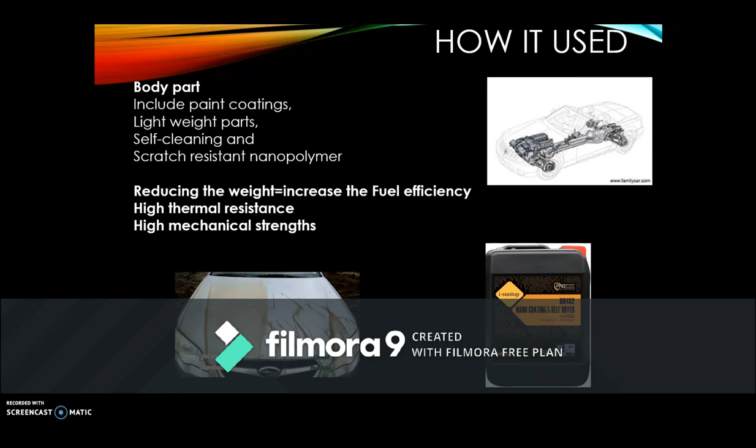Other than that, the material near the engine parts should possess high thermal resistance, whereas the exterior and structural parts should be made of a material that has mechanical strength.

And the second is engines. In a modern automobile, around 10 to 15% of the fuel energy is consumed by the friction of the mechanical parts of the engine. Piston, cylinder wall, crank drive elements like connecting rod, crankshaft, bearing, and valve drive system are the major friction-causing parts of the engine.

Heat generated by the engine and its cooling is another problem that we are facing in automobiles. At present, to overcome this problem, we use engine oil in between the moving parts to reduce friction, and a radiator and coolant to reduce the heat generated and cool the engine.

The functions of the engine oil, radiator and coolant can be increased by the application of nanotechnology. By coating the cylinder wall with nanocrystalline material, we can reduce friction and in turn the fuel consumption.

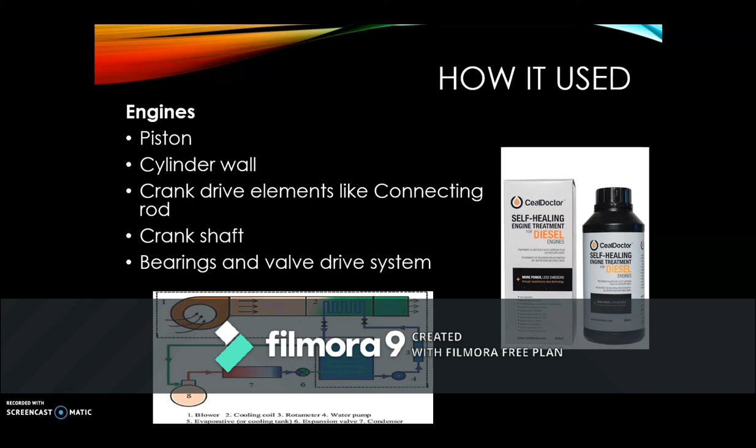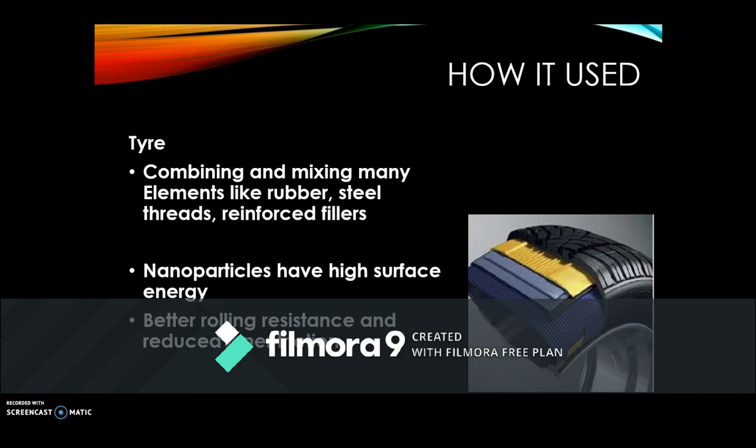And the third is tires. Tires are the most sought parts of an automobile in which nanotechnology is applied. Tires are not made of a single material but by combining and mixing many elements like rubber, steel threads, and reinforcing filler. As nanoparticles have a high surface energy, the interaction of the nanoparticles with natural rubber in the tire is high, which leads to better rolling resistance and reduced friction.

The next is ultra-reflecting mirrors and glass. Someday, while driving, we feel discomfort when sunlight falls on our eyes through the mirror and glass of our vehicle. We cannot see the roads or other vehicles properly because of the intensity of the light, and this can lead to accidents. An ultra-reflecting thin layer of aluminum oxide, having a thickness less than 100 nanometers, is applied

to the mirror to equip the surface with dirt and water repellent features. As the light falls on the glass or mirror, a certain voltage is generated and the voltage makes the charges move to the intermediate layer.

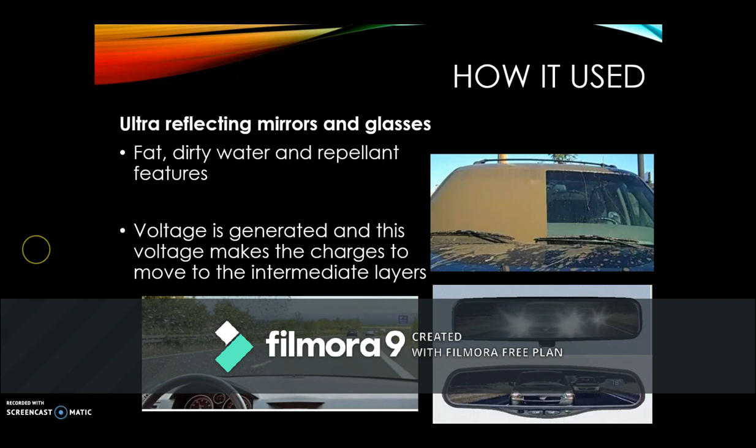Further advantages of nanotechnology in the automotive industry: nanomaterials have huge advantages due to mechanical properties unattainable from conventional materials. It has wide applications in technological driving aids like anti-lock braking systems, power steering, airbags, and so on. Depending upon the diameter of the nanomaterials, they have high electrical and thermal conductivity as well as mechanical properties due to minimum defects in the atomic structure.

This makes the car bodies robust and at the same time provides generous crumple zones in case of accident. The dashboards and body panels made out of these materials are highly resistant to scratching and surface damage. This makes them profitable for building fuel tanks. This type of tank ensures that the fuel energy is harnessed from the fuel in automobile combustion, thus reducing environmental pollution.

Using nanotechnology in car tires could save millions of gallons a year caused by under-inflated tires and will lower accident rates. In addition, polymer nanocomposites that are manufactured commercially for diverse structural vehicle applications and nanofillers for exterior vehicle panels increase the modulus of materials. Carbon nanofiber used in automotive exterior panels reduces weight in bumpers and fenders.

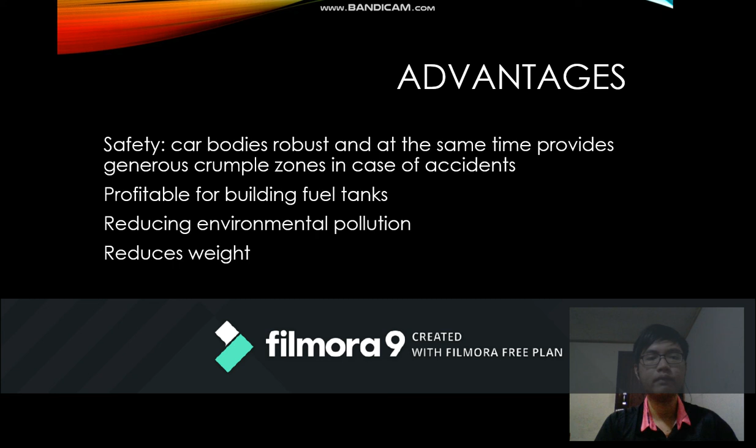However, there are still a few disadvantages of nanotechnology in automotive industries. Nanotechnology is still in the development stage as compared to other well-established branches of applied science. People are concerned about potential substantial risks that nanotechnology might hold. Even engineered nanomaterials can behave uncertainly, disrupting health and environment.

Nanotechnology has to face social challenges, as mass production of vehicles will make the market more cost competitive. Much of the discussion on the need, regulation, development, and application of nanotechnology is still inconclusive. Ultimately, it is in consumers' interest to approve nanotechnology favorably.

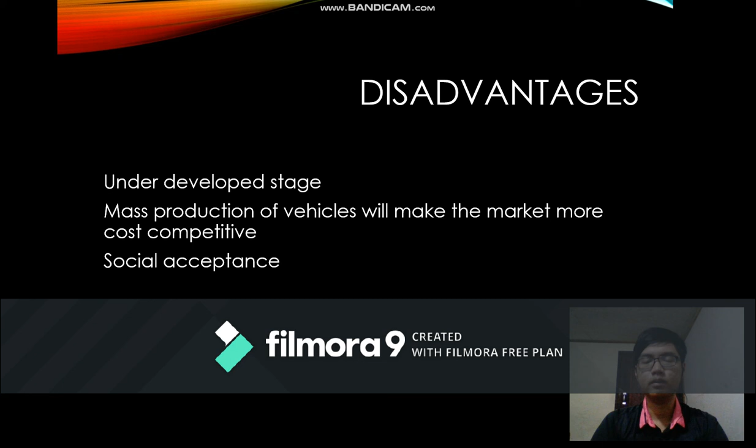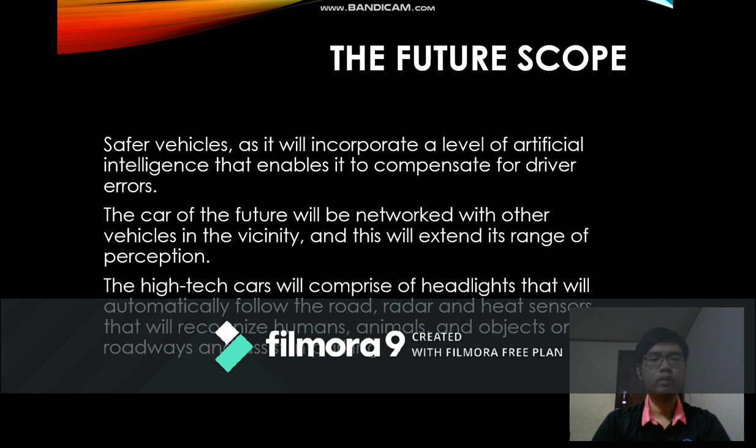For the future scope of nanotechnology in automotive industries, a safer vehicle, as it will incorporate a level of artificial intelligence that enables it to compensate for driver errors. The car of the future will be networked with other vehicles in the vicinity, and this will extend its range of perception. The high-tech car will comprise headlights that will automatically follow the road, radar, and heat sensors that will recognize humans, animals, and objects on roadways and assist in parking.

In conclusion, nanotechnology is about to explode as a major shaper of automotive industries. It has brought tremendous innovation in transforming the industrial outlook. Significant use of nanotechnology in the automotive industry has increased the production scale. Lastly, by the end of this decade, nanotechnology is expected to be a generic technology accepted worldwide.